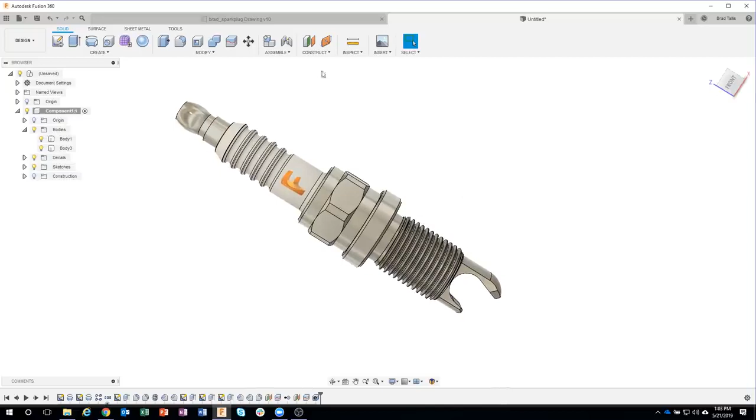I went ahead and created a drawing of this, which you see on the screen now. I've included a link to this drawing in the description of this live stream so you all have access to it. Hopefully there are no missing dimensions, but I'll reference this drawing as we go through.

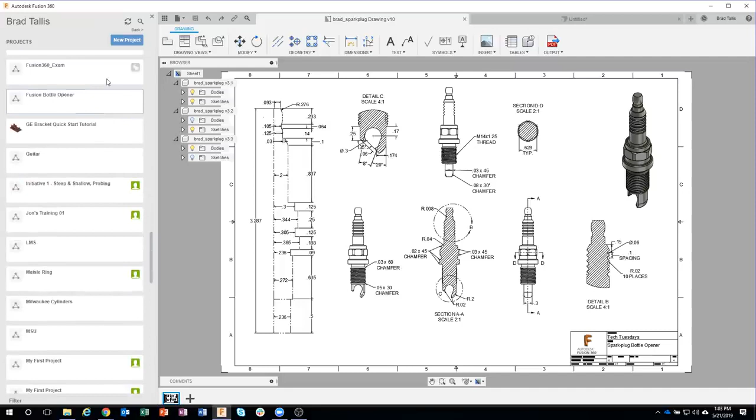The first thing I'm going to do is create a new project. I'll click this new project button and call it Fusion Bottle Opener. It's going to create a new project that I can save my data into. I'll go inside here, and you can see that right now there's nothing in here.

It's broken into two sections, data and people. When I start saving stuff, it'll show up here. But if I click on this people tab, you can see right now I'm the only person in here. Well, Aaron is our project lead for this, so I'm going to go ahead and add him and invite him into this project. That means he'll have access to the data inside this project, so he can view any of the drawings, any of the models, and make comments on it.

Later on in this live stream, I'm going to send an invitation or link to Angelo once I've finished the 3D model. So I've created a new project and invited the person I want into my project. This is great if you have an engineering team where multiple people are working on the project.

Then the next thing I'm going to do is start a new design and save it into this project, and I'll call it bottle opener. You might say, why are you saving it right now? Well, by pushing it into this project, my autosave has now kicked in, so anything I'm doing will get automatically saved per the time I have set in my preferences.

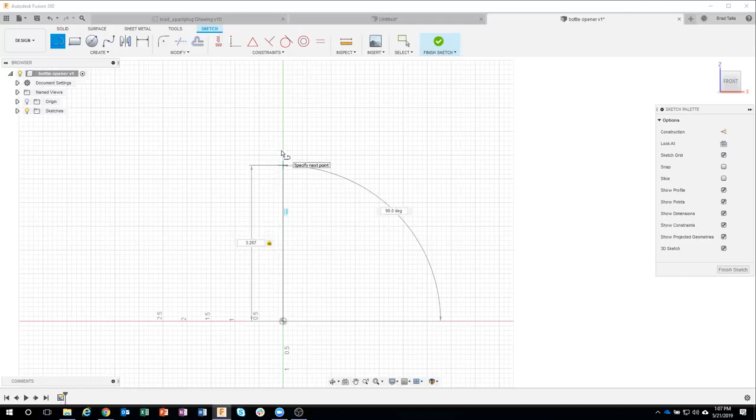Then I'm going to basically freehand the side profile. Instead of typing in a whole bunch of dimensions over and over again, I'm just going to freehand it. I know the overall length, according to my drawing, is 3.287, so I'm just going to draw a line straight up 3.287. Then I'll start down here at the bottom and type in a couple of these, and you'll see why in just a moment.

So I'm typing in 0.236. I'm going to zoom up here a little bit, and then I might do one more — this one's 0.5. The reason I'm doing this is I want to get a basic idea of the overall size, because now I'm going to just freehand the rest.

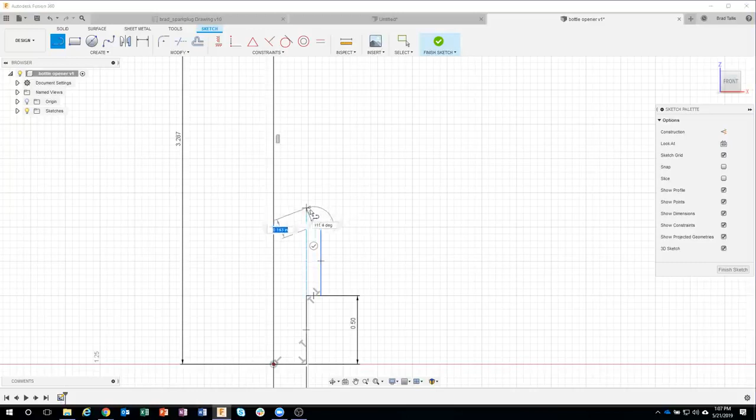Check this out — I'm just going to click over, come up a little bit, and again I'm following the drawing to get the basic shape of what this looks like. So I'll come up, making sure I don't hit that little green check box, and just kind of come to the side of it and fly through here real quick.

Let me just do something like this — come up, come over a little bit, come up, come over a little bit more. As I zoom out, I can kind of see I'm near the top, which is about where I want to be. So this is going pretty good. I'll go something like this, come over — I'm going to have to zoom up just a little bit.

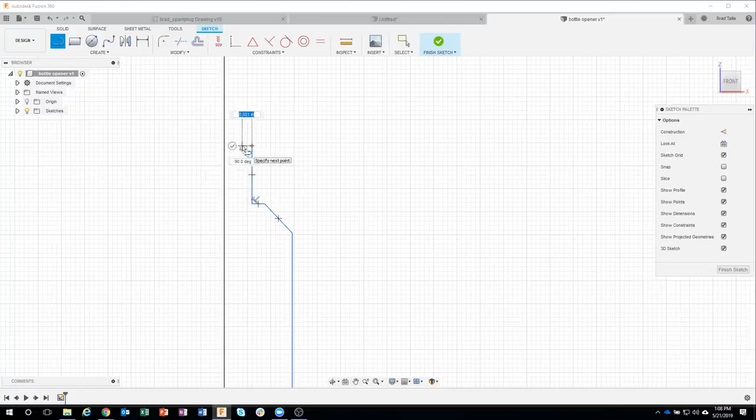Again, you'll notice I'm not typing in any dimensions at this moment — I'm just getting the overall shape that I want, using my drawing as a reference. You'll notice it's creating these perpendicular constraints for me automatically, which is good because I want straight horizontal and vertical lines, but they're kind of in the way.

So here's a neat little trick — I'm going to turn off show constraints, and you'll see that really simplifies what my sketch is going to look like. Now I can come in and start dimensioning the rest of this.

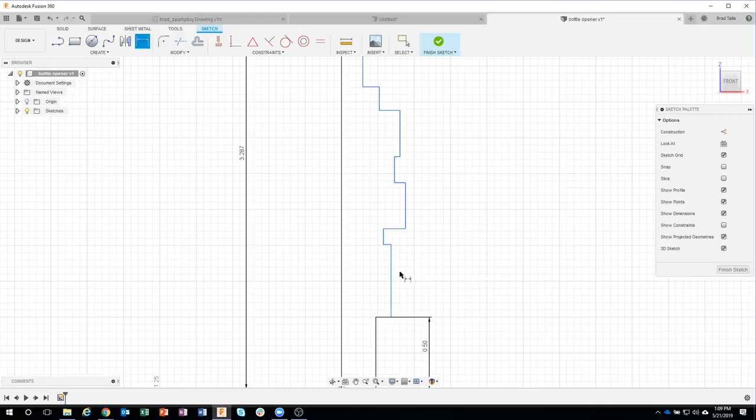So I'll hit D for dimension, and I'm just going to click on some of these heights. For example, this is supposed to be 0.635. Now watch what happens when I do this — this is exactly why I said to start creating your basic shape and get some dimensions on there. You'll notice that when this went above it, it made things a little confusing.

Well, all I have to do is grab that line and bring it up a little bit. So if your sketch overlaps or whatever, you can drag that up, or I could even drag a window and move all of them at the same time. So you can see how I'm able to update my sketch easily instead of having things overlap. You might see this happen as I continue on, but you don't want to get confused, so just do it step by step.

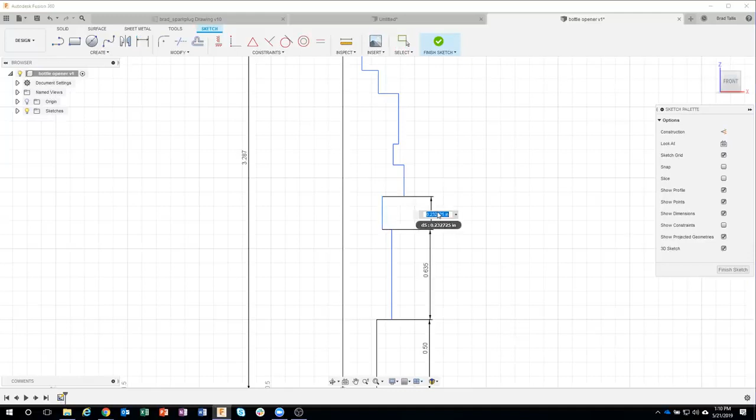So I'm just going to continue dimensioning here. Again, I just have to type these in — let me put my glasses on so I can read these.

0.09. And when I hit enter, you're going to see that my sketch updates. So I'm just working my way up the drawing. So I'm going to say 0.188. This one's 0.125, again pulling this off of the drawing. This is a quarter inch, 0.25.

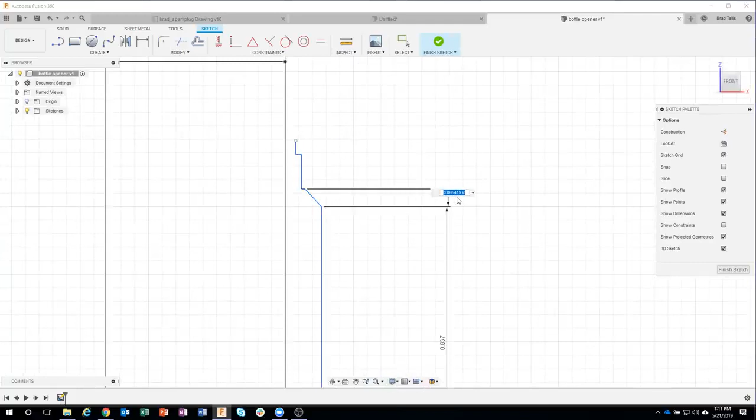And you can see that this actually goes pretty quick. Instead of having to type in multiple dimensions while sketching, like the horizontal, the length, and all that kind of stuff, I'm able to just come in and say all of my heights. So you can kind of see how that updated just a little tiny bit. Let's zoom up here—this height is supposed to be 0.1. And you can see, again, another example where my sketch changed a little bit.

So I might want to move these guys over, okay? Or I could just bring this point over like so. I have a bunch of different methods there, but I kind of want to keep my overall profile. I think it just simplifies things. So let's go ahead and finish this up, 0.14.

That one kind of made my sketch disappear a little bit, so I'm going to undo. Let me just get rid of that dimension, and let's bring these up a little bit, like so. Okay, and now I can throw my dimension on here and say 0.14.

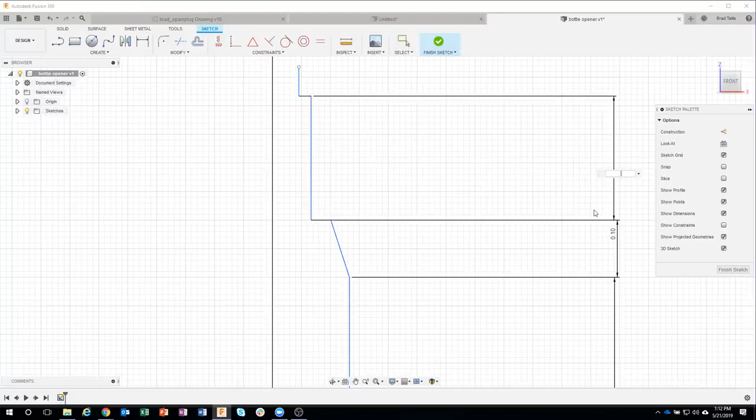And then finally I have this 0.064. Okay. So then I'm going to do one more across the top here, and this one I know is supposed to be 0.093. So then the next thing I'm going to do—I've done all my heights, now I'm doing all of my widths.

So I'm just going to go ahead and pick my center line and that other line and kind of work my way back down. So that's 0.105. This guy here is supposed to be 0.125.

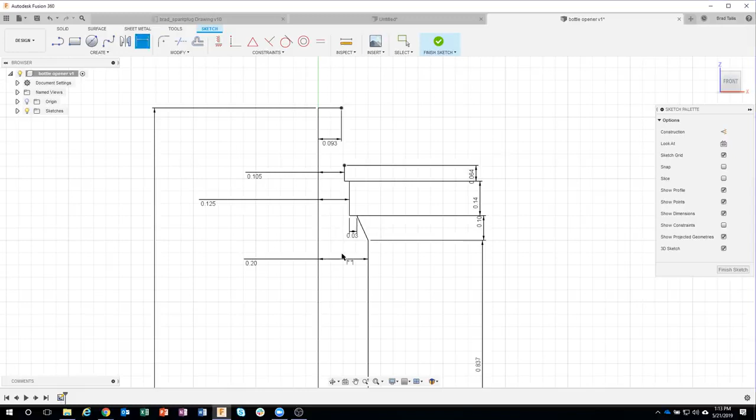And we can kind of see how some of this stuff is updating. Let me go ahead and do this dimension here—that's 0.2. And we can kind of see how that's all updating. There's a dimension here that's supposed to be 0.03. And we can see my sketch is now starting to turn black, which means it's being fully constrained.

By these dimensions, you'll see some here that are blue because we haven't constrained those yet. But if I come in here and add a dimension, that one's supposed to be 0.3. You can see how these are now updating and saying that they're fully constrained. So 0.344, 305.

Just a couple more here and then we'll be totally done with our profile. Now, you've heard me say in the past, keep your profiles simple. And this is taking a little bit of time, but we're actually making a really descriptive sketch here. So let's go 0.236.

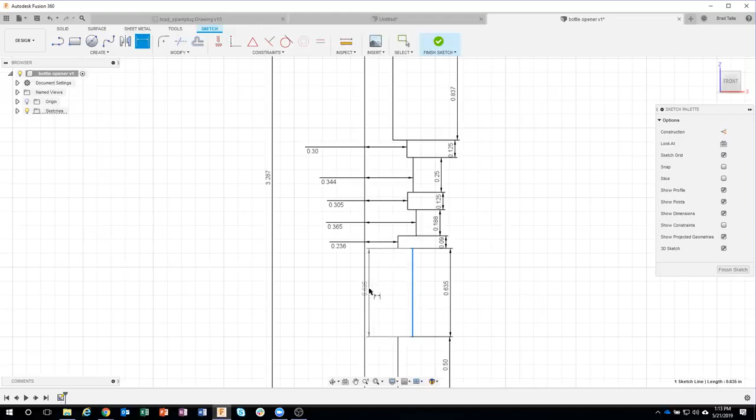And this guy here, I think is our last one, 0.272. Okay, so we can see that our sketch is totally black and fully constrained. However, I don't see it shaded in, saying that it's a valid profile. So I need to figure out what's going on there.

So I zoom up here, we can see that we actually haven't finished the sketch yet. And there's a curved section right here. So I'm going to go ahead and add in that curved section.

Okay, so I'm going to use the 3-point arc. I'll just click on that start point, that end point, and then I'm just going to kind of click out here in space like so. And notice what happened—because we closed this profile, it's now kind of shaded in with that tan color, saying that it's a valid profile.

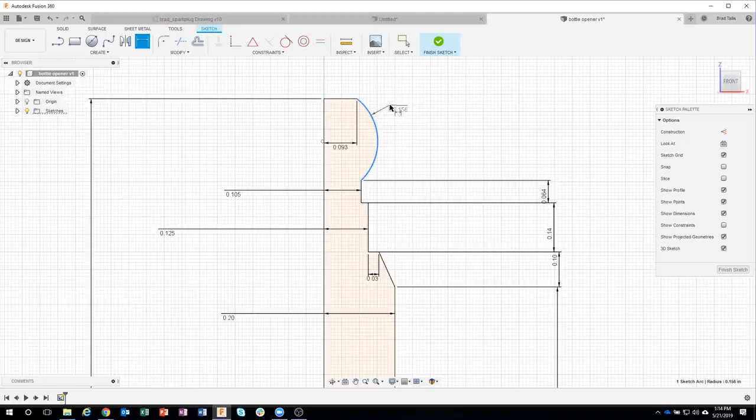I have a couple more dimensions on here, so let me just go ahead and put a dimension on here, and the radius is 0.156. And we can see that that is now black, which means it's fully constrained. We now have a valid sketch.

And I've mentioned in some of my previous live streams, you want to try and get a valid sketch, a fully constrained sketch, as much as possible. That way, if you make a change, you don't get weird results. So we spent a little bit of time typing in the dimensions, but now we're actually ready to turn this into a 3D model.

So I'm going to go ahead and finish my sketch. And I'm going to say create, and instead of extrude like we typically do, I'm going to come in here and say revolve.

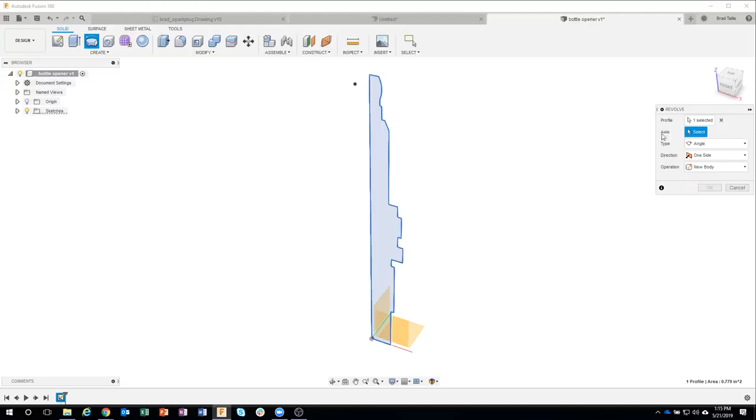It's asking for the profile, so I'll select the profile. Then it's asking for the axis. What do you want to revolve around? I'll click that vertical line down the center, and you can see we get a nice 3D preview of what this is going to look like.

I'm not going to go through all of these, but at the very bottom you can see it says new body. Well, you know what? I got to thinking, gosh, I probably should have created this as a component. In some of my previous live streams, I talk about how you should always try to create your objects as components, but I forgot to.

But check out this cool little trick. I'm going to go ahead and say new component and say OK. And sure enough, it created a component for me. I can go ahead and rename it. I'll just call this plug.

However, my sketch is not part of this component, and I really wish it was. Well, all I have to do is just drag this down on top of my plug component, and you can see that it put that sketch down there for me automatically.

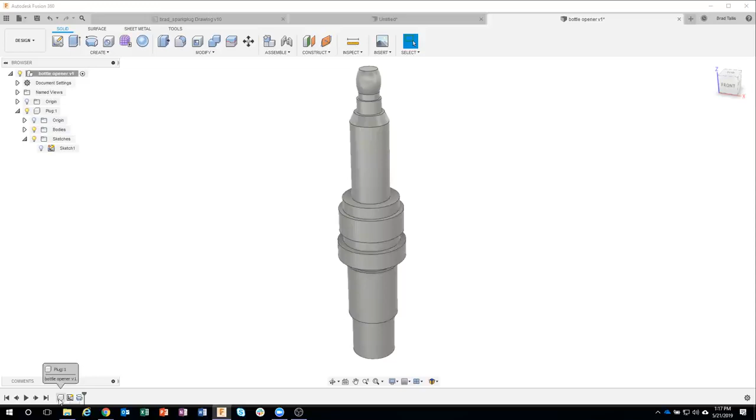Notice how smart Fusion is. Even though I created the sketch first, it actually said, oh, you have to have the component created first, and then you can do the sketch. So it actually fixed my problem for me. I think that's really cool.

And again, I really like having components. It keeps your timeline simpler. Now, in this case, I only have one part, but still, I'm just going to go ahead and activate that component and keep everything kind of organized underneath.

Okay, so looking at the drawing, I'm going to look at this and say, okay, what's the next big thing I want to create? We can see that there are these little grooves right here at the top of our part. You might ask, well, how come you didn't draw those as part of your profile? I absolutely could have, but I'm going to show you some neat tips and tricks with this.

Like I mentioned before, I like to keep my sketches simple and let Fusion do the hard work. So I'm going to go ahead and create one of these circles here and cut it into our part, and then we're going to use a pattern to add the rest of these.

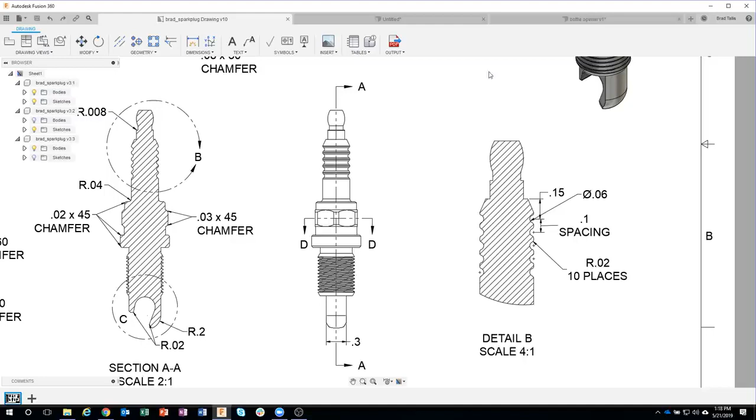Okay, so I'll go ahead and say create a sketch. Let's just do it on our front view here. I'm going to zoom up so we can see what's going on. C for circle, or I can hit the circle command here.

I'm just going to hover over this point, and you can see it creates what's called a snap guide. So I can hover over that point and come down a little bit. You can see how it's basically sticking to the side of our part here. So I'm going to go ahead and click, and our circle is 0.06 in diameter. So I'm going to type in 0.06.

Then I want to make sure it's in the correct location, so I'm going to throw a dimension according to the drawing. This is supposed to be — and I was pretty close — 0.15 from the top. So there you go. So I drew the size I want, it's right on the edge. I'll do 0.15. And we're going to use the exact same command.

We're going to say revolve. We'll click on our profile. What's the axis? Well, I can come in here and just click on a cylindrical face like so, and you'll notice it gives me a red result. That is because of this operation right here.

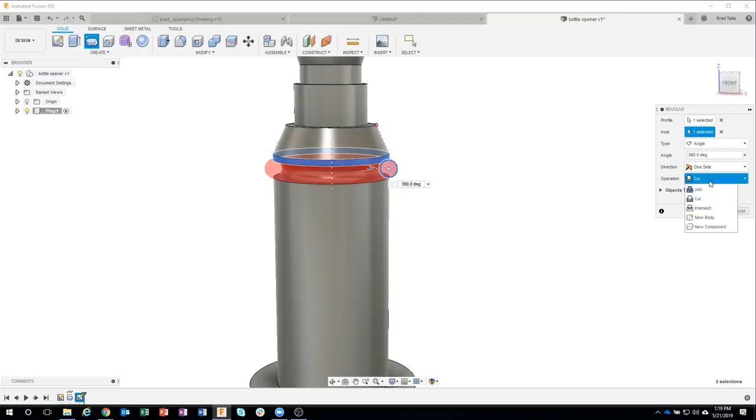We're saying we want to cut that profile away. If I said join, it would actually create almost like a ridge or like a bump or something like that, but in this case we want to cut that away. Okay, so I'm going to say OK, and we've just created our very first groove.

Now I want to create 5 of these total. So again, instead of creating a complex sketch, I could come in here and say let's create a rectangular pattern. Now I know that seems kind of weird, but we want to make it go in one direction.

Okay, so along a line basically, I'm going to say rectangular pattern. And here's the cool thing: you'll notice that under pattern type we have faces, bodies, features, and components.

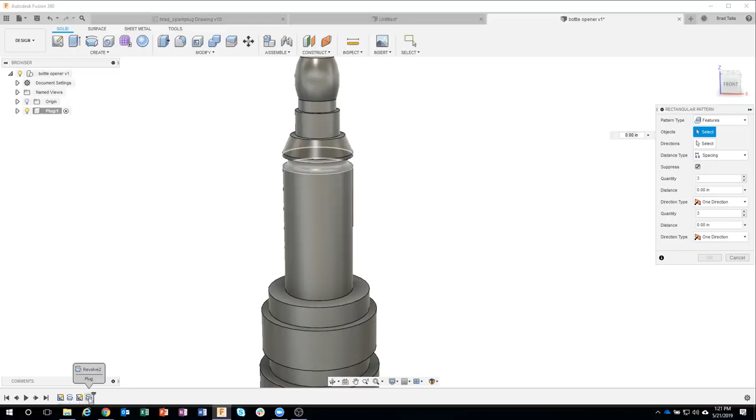Now I could select faces and then click on that face. But what if there was a bunch of different faces, maybe 3, 4, 10, 12? I wouldn't want to have to select all of those. So instead, I'm going to change this to features, and I'll select the Revolve feature in the timeline. That is going to select anything that has to do with the Revolve feature.

So I use this one I would say 95% of the time. The direction, I'm going to specify in this vertical direction, clicking on this vertical axis right here on our origin. And now I get these little arrows, and I can specify the direction. We can see that we're now patterning that Revolve feature down in that direction. I said I wanted 5 of these, so I'm going to click on 5, and now we can see there's 5 of these rings.

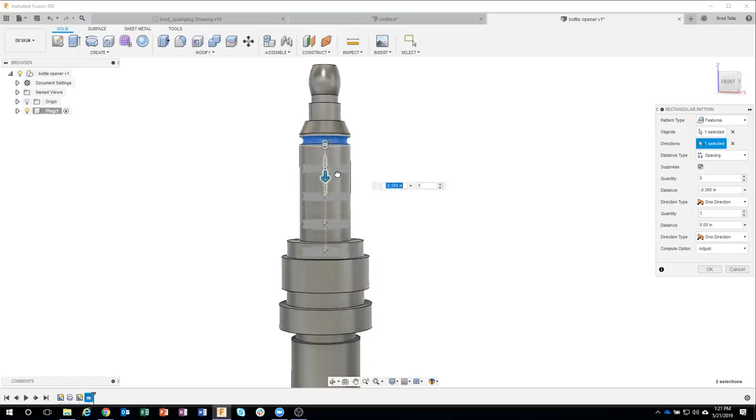I also want to specify either extent or spacing. By default it's usually set to extent, but in this case I'm going to say spacing, and I want them spaced 0.1 inch apart, according to the drawing. I'll say OK, and now we have all of those grooves.

Now, I know that seemed to take a long time because I was doing a lot of talking, but literally, you just select it, tell how many you want, and it creates the pattern for you.

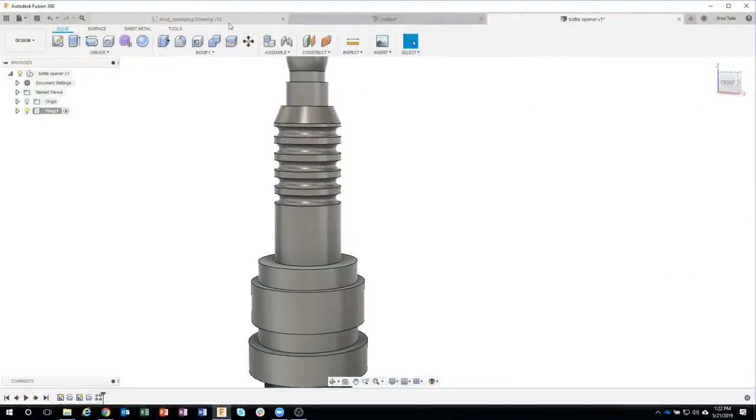Now check this out, this is probably my favorite part. According to the drawing, there are little tiny fillets or blends on each of these little ridges, so there's quite a few edges I'd have to select and put a 0.02 radius on those.

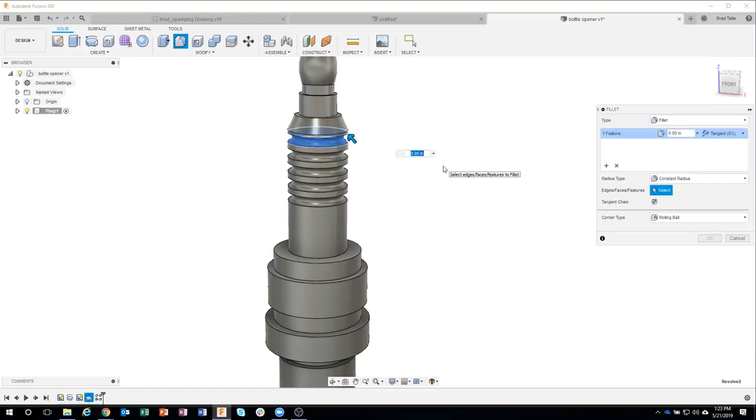Well, check this out. Instead, I'm going to come in here and say fillet, and come down to my features here, and notice what happens when I'm hovering over these. I'm going to click on this first one, and now it's asking for a size. I'm going to say 0.02, and look what it did: it actually picked the edges that had to do with that particular feature. So instead of me having to manually hover over and click those edges, I was able to just click that feature. In fact, let's add in the pattern feature, and boom, instantly it filleted all of the edges for me.

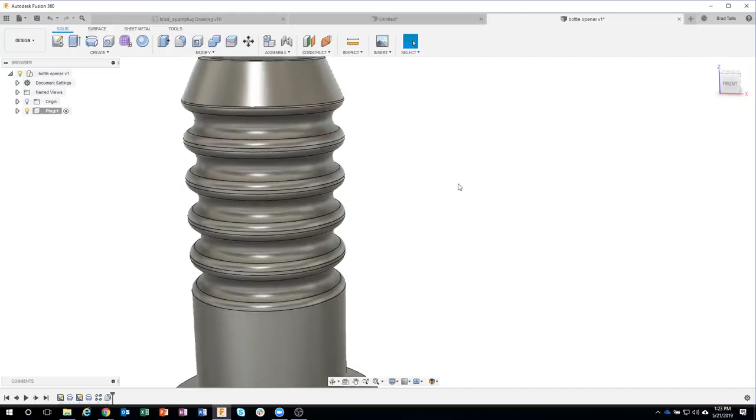So I could have done edges, or I can do features. Literally in about 2 mouse clicks, I was able to blend all of those in one fell swoop. Hopefully you think that's as cool as I do. I think it's pretty neat, honestly.

Okay, now basically, like I said, I'm kind of working my way down with the major stuff. I noticed there's a fillet, some chamfers, this hex nut shape, so I'm going to keep working my way through this model. I know there's a fillet here.

So one of the tips I really like to use is the pre-select and then the right mouse click. What does that mean? Well, I click on this edge to pre-select it, and then I right mouse click, and it shows me the commands that make sense. So instead of having to always go into a menu, I can just click on something, for example a face, right mouse click, and there are the commands that make sense.

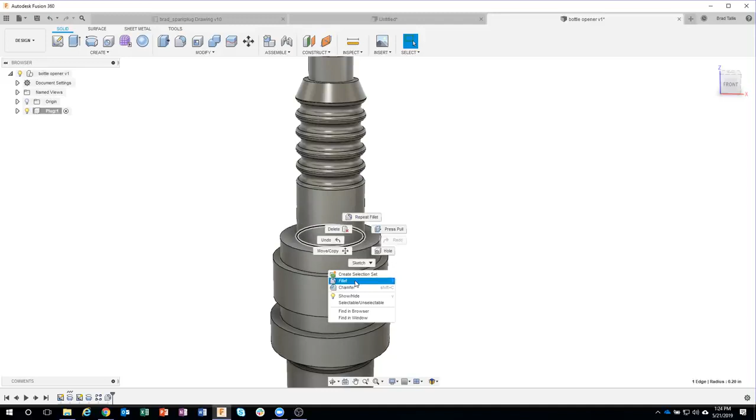Okay, so this is really fast for fillets and chamfers. I just click on the edge, say fillet, and that's supposed to be 0.04. Then I'm going to click on this edge and say chamfer, that's supposed to be 0.02. Now according to the drawing, there's a couple other edges that are also 0.02, and I kind of like to group things together, so I'm going to do all 3 of these edges at the same time, which simplifies my timeline.

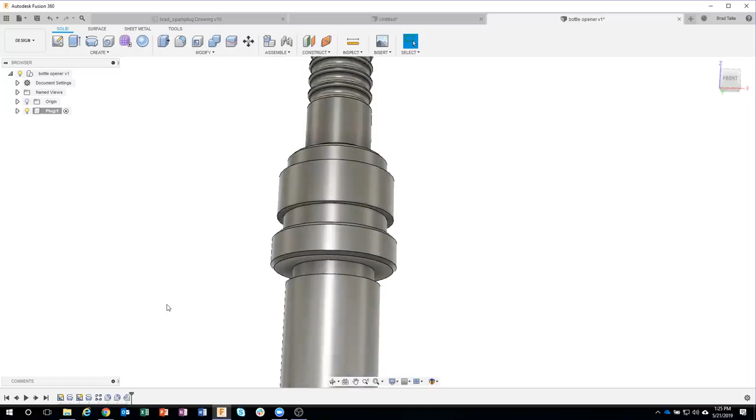So I only have basically one chamfer feature in here. I could have done all 3 of these as 3 separate chamfers, and that's totally fine, but I kind of like to group things together. If they're the same size, let's just do them all at once. Again, not saying that's how you have to do it, I just find it easier that way.

And then there's a couple other chamfers that are a different size, so let me go ahead and again pre-select, right mouse click. I'll say 0.03, and I'll select both of those edges for my 0.03 chamfer.

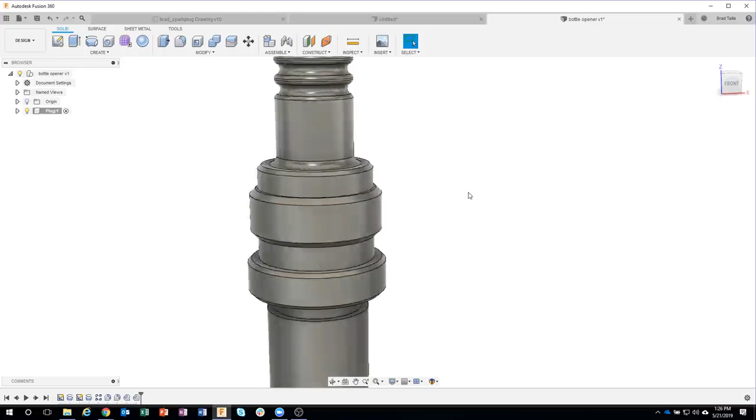Notice how complex our side profile is here. I could have drawn these chamfers as part of my profile before I revolved it, but that would have taken extra time and a lot more dimensions. I would much rather do it in 3D than have to do it in 2D.

The next thing I want to do is create a hex nut pattern on our part. According to this section view, that's about 0.628 across. I'm going to show a cool little trick here.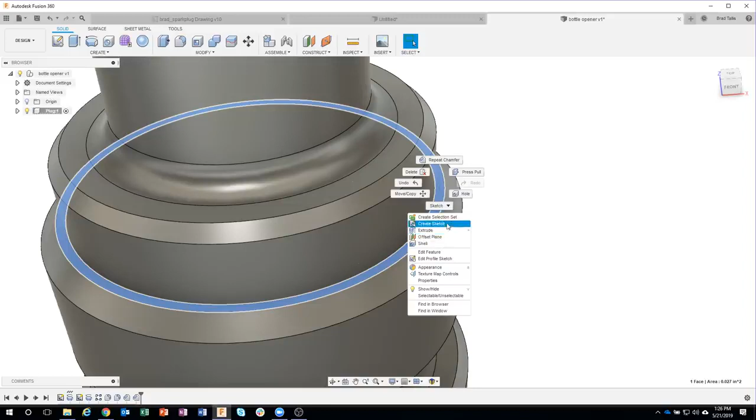Let's go ahead and pick the face that I want to put this on. It's actually going to be on this face right here. I'll click on that face to pre-select it, right mouse click, and it shows me the commands we can do with that face. I'm going to go ahead and create a sketch on that face.

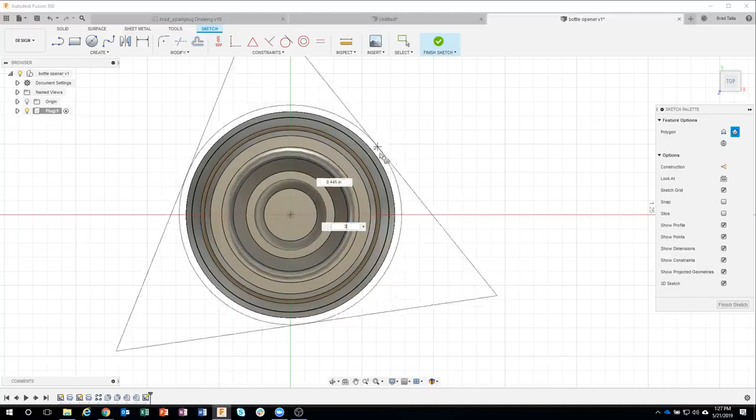In our sketch menu, we have a cool command under Polygon called Circumscribed Polygon or Inscribed Polygon. I'm going to do this Circumscribed Polygon. I'll click our center point, and you can see what happens when I bring this out. It's creating a 6-sided polygon that's touching the outside of that circle, and you can see the number 6 right here. If I change that to a 3, it turns into a triangle. So we want to put that back to 6.

I'm just going to click over here somewhere. I don't care about the size or anything like that. Now I want this edge to be vertical, so we'll add a horizontal vertical constraint. I'll click on that guy and we can see how it became vertical.

Now I also want this edge to be tangent with our part, so I'm going to say tangent, click on that edge there, zoom up here a little bit, and click on this edge right here. You can see it highlight blue when I click on it. And we can see how that polygon is now tangent to that circle, and it's also vertical because we forced it to be a vertical constraint.

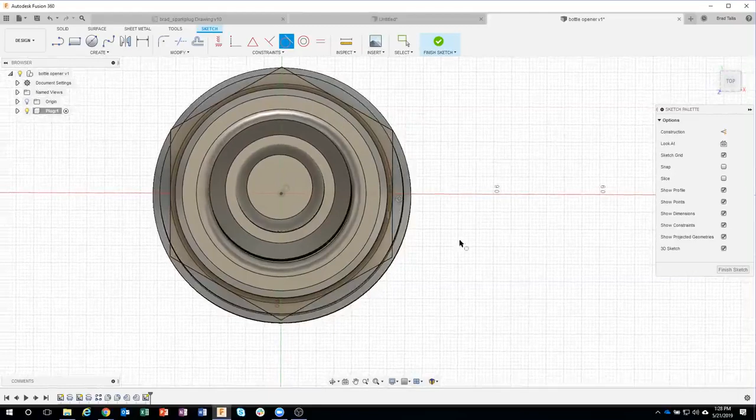If I throw a dimension on here really quick, we could confirm that's the correct size, 0.628, and it says it's going to over constrain, which is because it's already fully constrained. So I could say OK to create a driven dimension, and sure enough we can see that's 0.628. I'm going to undo back because I don't need that.

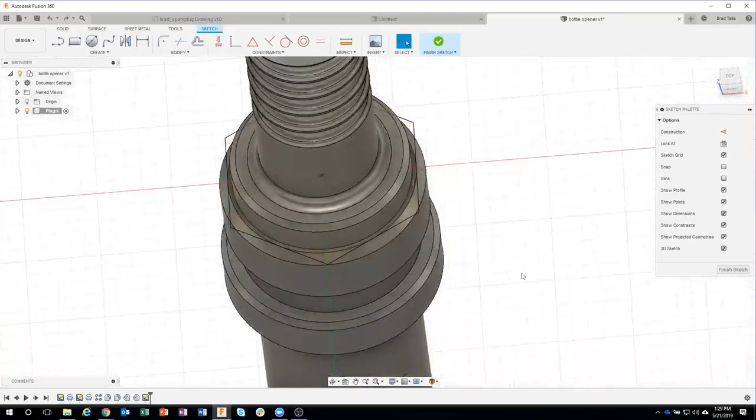If we take a look at this, we've created this hexagon profile, but I want to machine away where these flats are. I could potentially use the intersect command, but that probably would destroy a lot more of my model, so I need to add another profile here.

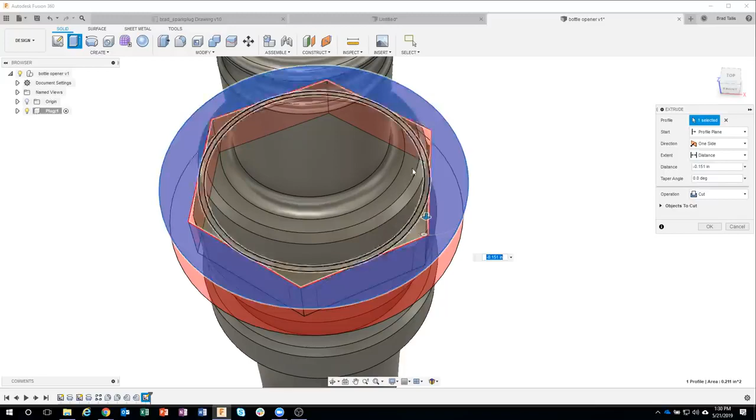I'm going to just create another circle that goes larger than this polygon, and that's going to allow me to create a profile like this. It's almost like an external profile, and now we can see it's going to keep everything inside the hexagon. If I say extrude, it's going to machine away and create these flats for me. So there might be some situations where you need to add an extra profile around, for example, the outside, to get the reverse of what you have with just a single profile.

Here's another tip you've seen me use before. How far do I need to go? All I have to do is click on this face right here and it's going to snap to that face. I'll say OK, and we very quickly were able to create this hex shape part.

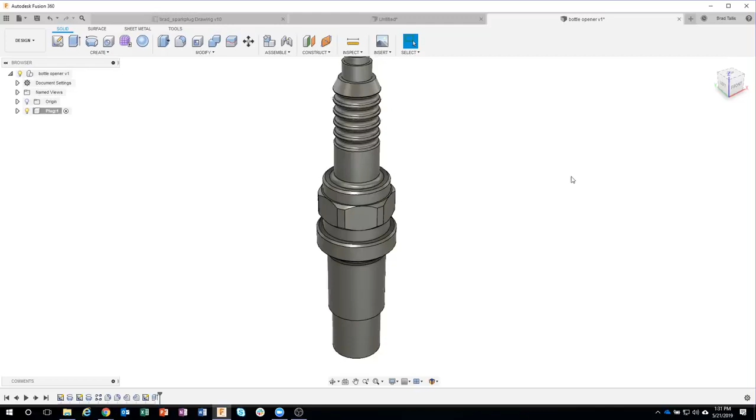Moving forward here, I'm going to go ahead and add a couple more details. There's a really tiny fillet on the top here. I think it's 0.008 according to the drawing.

I tend to try and do my type commands in my timeline. So you'll see, for example, right here, I've got my fillets and chamfers kind of grouped together. I try and do those as much as I can.

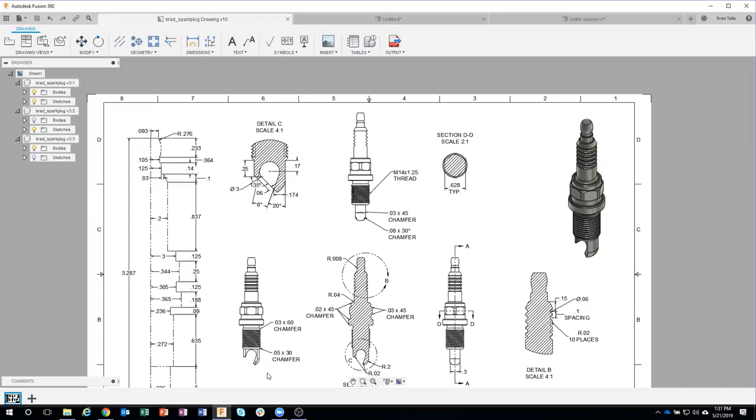Now let's jump back to the drawing really quick. We've been working our way down. I'm going to leave the threads for last because they're pretty intense and heavy. So now I want to start working on the actual opener part, and there's a lot of information going on here. Let's break this down into its simplest form - it's kind of a rounded shape.

I'm going to start by adding this 0.2 radius on our 3D model. I'm just going to zoom up here, click on that edge, say fillet, and that's going to be 0.2. And you can see how it rounded that whole bottom edge.

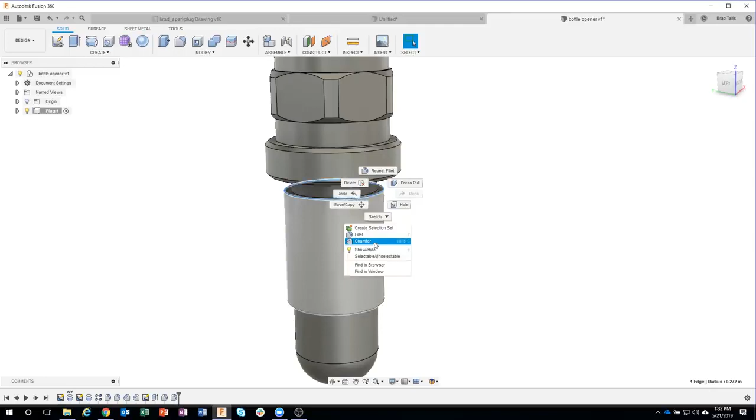Then the next thing I want to do - maybe there's some chamfers going on here. I'll go ahead and add those. I'm going to click on this guy and say chamfer. Now according to the drawing, this by default is usually set to equal distance. Let's type in the 0.03. And we can see that that worked.

But according to the drawing, it's 0.03 at an angle of 60 degrees. So under chamfer type, I can come in here and say equal distance, which makes it basically a 45, two distances, or distance and an angle. So I'm going to change it to distance and an angle, and now you can see it's 0.03 at 45 degrees. Let's change that to 60 and watch what happens to my chamfer. You can see how it slopes down at 60 degrees - it goes in 0.03 and slopes down 60 degrees.

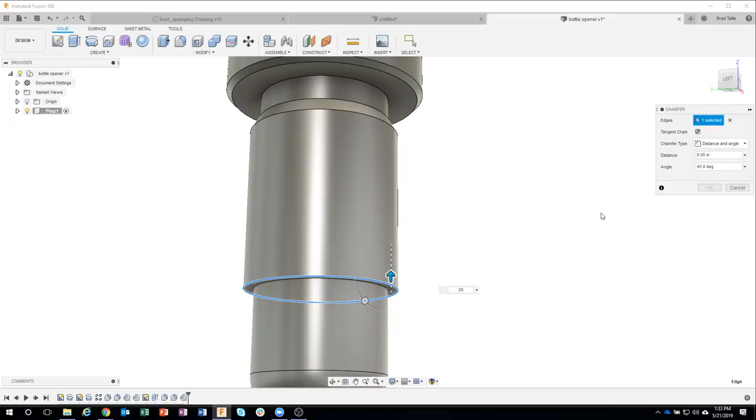I'll go ahead and click on this edge here and say chamfer. This one is 0.05, but notice what happens - I type in my distance and I get an error. It says the fillet cannot be created at the requested size, and that's because of this angle right here. It's 0.05 at an angle of 30 degrees, and we can see how now that chamfer works correctly.

So there are a couple options in some of these menus - check those out. I'll say OK.

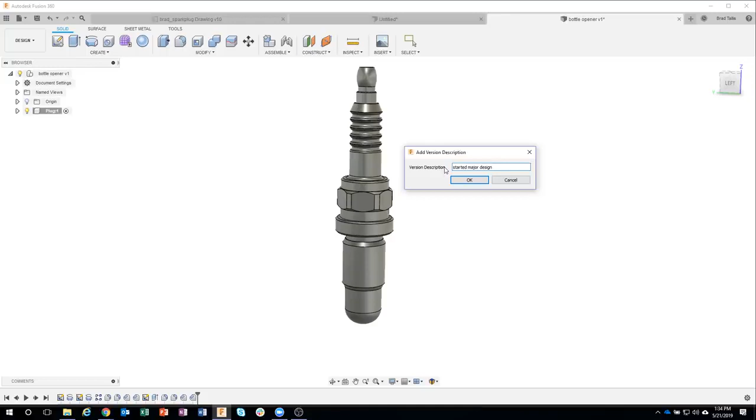Now I've got quite a bit done, so I should probably save. Because I already saved, you can see it's at version 1. All I have to do is click save. I could type in a description if I wanted to - I could say 'started major design' or something like that. It's going to go ahead and save that as version 2. So you can see now it says version 2. I recommend saving fairly often.

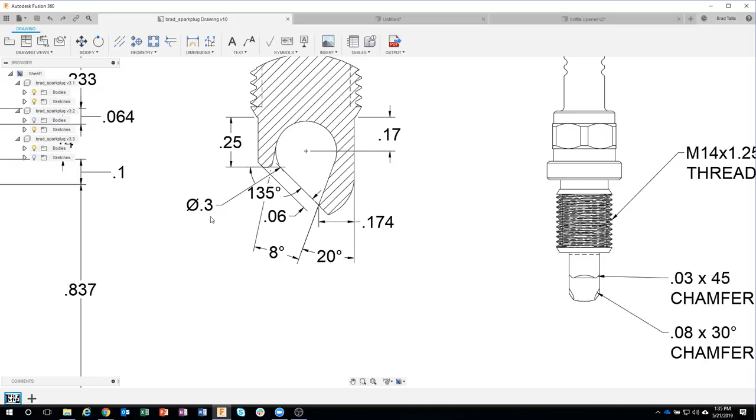So the next thing I want to start doing is working on the notch part of this, the bottle opener part. I'm going to go ahead and create a sketch. Using the drawing, I'm going to be basically creating this area right here, and we can see there's quite a few dimensions. There might have been an easier way to dimension this, but this is what I came up with, so hopefully it makes sense. We're going to start with the major part, which is this 0.3 circle, and then I want to create these angled edges.

So I'll start by creating a circle, and I'm going to purposely create it off center. As I've mentioned in previous live streams, I like to force Fusion to use these constraints and make sure that they're correct. So for example, I want to say make that point and that point vertical with each other, and we can see that it physically moved over - to me that's verification that it worked. I could have drawn it close to this line and hoped it was close, but I like to physically see it happen.

Okay, I'll throw a dimension on here. I know that this is 0.17 from this edge, so I'm going to say 0.17, and that pushes it down where it needs to be. I can see that that has turned black, so I know that that's physically constrained.

Now I want to draw the notch part, so I want my lines to be tangent. I'm going to hover over this line, hold down my shift key, and watch what happens when I draw my line.

You can kind of see how it's staying tangent to that circle. So I'm just going to draw something like that. I'll come over here maybe a little bit, and then hold down my shift key again until I see the tangent icon kind of pop into place. We can see that little circular icon with a line on it - that's my tangent icon. So I'll go ahead and click, and sure enough, we can see there's tangent and there's tangent.

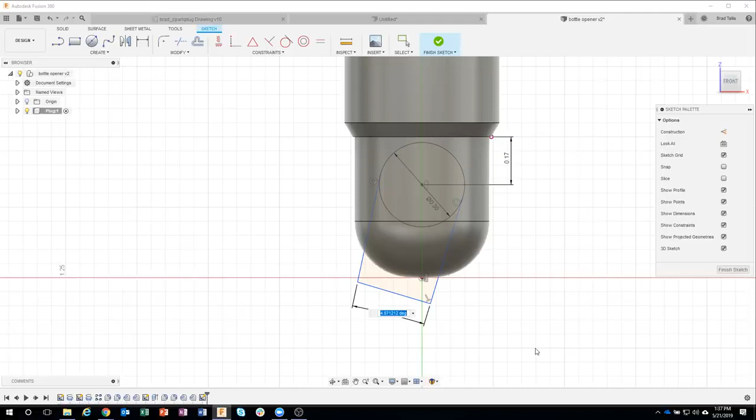Okay, so now I'll start throwing some dimensions in here. I know that the angle between these two lines needs to be 8 degrees. Watch what happens - it goes ahead and does that. It moved my dimension, let me bring this back down here a little bit. It kept my lines tangent, but it made that 8 degrees. You can see I can move this around, for example.

Okay, I also know that it needs to be 20 degrees from this vertical edge. Now, unfortunately, I don't have an actual edge right there, and I want to have one that I can reference. So we're going to use the project command. I'm going to come over here to project, and I'm just going to go ahead and project the whole body. Watch what happens when I hover over and click - you'll see that it will project all of these edges. In fact, if I turn off the body, you can see it projected that outside profile for me. Now I have something that I can dimension.

For example, this line and that line - I want that to be, instead of 18 degrees, I want it to be 20 degrees. Watch how the little notch kind of rotates a little bit. It still stays tangent, but I've now specified the exact angle of this notch. That's kind of the important part here.

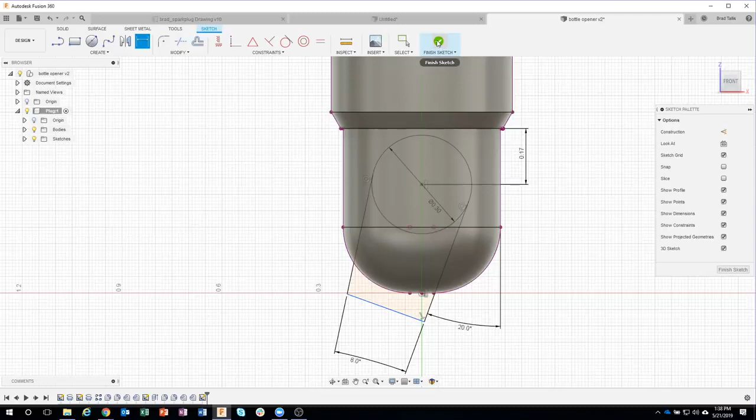Okay, so I'm going to go ahead and finish my sketch because I'm pretty much done here. Now, here's an issue you're going to run into. I want to select that profile, and you'll notice that the faces are kind of in front of it, so I'm not able to select that profile. Well, if I click and hold for about a second, you'll see it allows me to probe through - so there's the first thing it's hitting, and then there's the second thing, the profile.

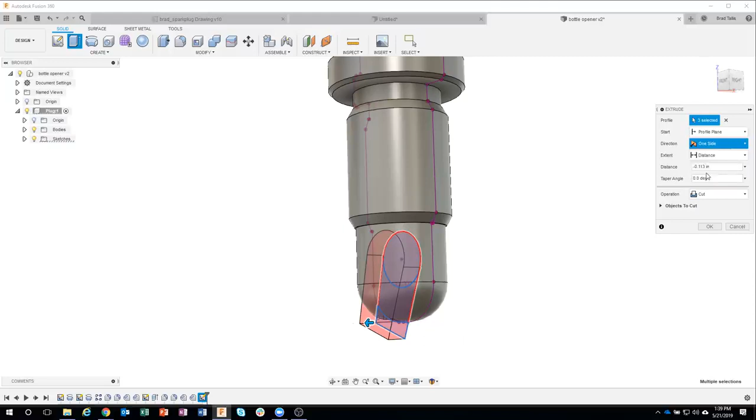So I'm going to do the same thing here - click and hold, grab that profile, and grab that profile. All you have to do is click and hold. We'll say extrude, and I'll start to extrude. Now how far? Well, I want to go symmetrically, and I want to cut through all of it, so I'm going to say all - I don't care how far it needs to go, it needs to go far enough to cut through all of it. We can actually see the preview that it's giving us. I'll say OK, and we now have the basic shape of our notch.

Hopefully this is making sense for everybody. Okay, looking at the drawing, if we look at it from the side here, we can see that it's only going to be 0.3 wide. So we're actually going to have to remove some material over here, so I'm going to go ahead and do that next.

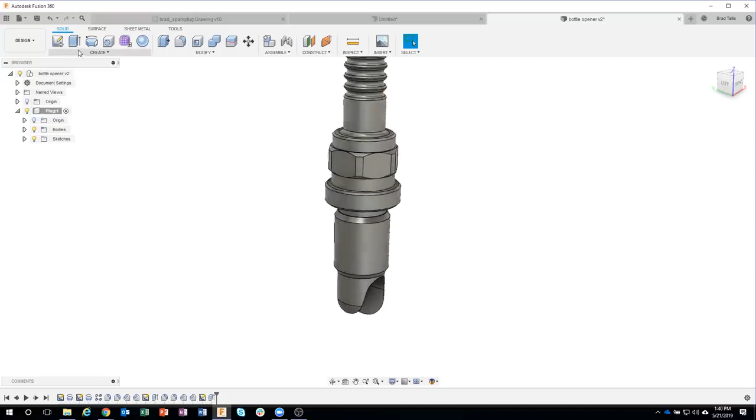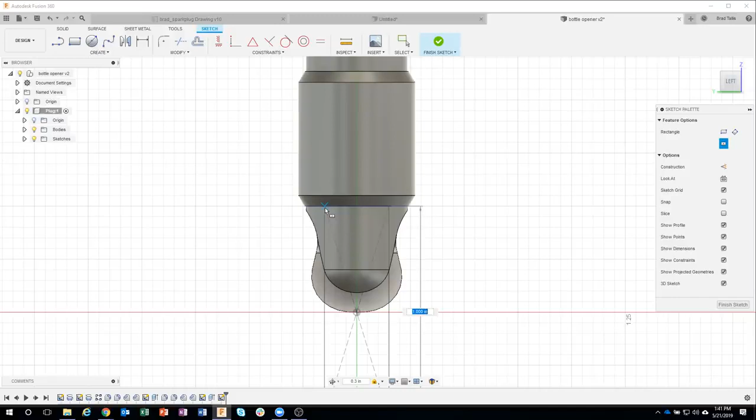So let's take a look and come in here and let's just go ahead and create a sketch, maybe on this left plane. And I want to keep a 0.3 region. So here's another little tip that I tend to use - I really like this center rectangle command. So even though I started the regular rectangle, the 2-point rectangle, I'm going to click on center rectangle. I can click here and start to move, and you can see that it's asking for a width. Well, let's do the 0.3, and it's now locked that into place. So no matter how I move my cursor now, you can see that we are locked at 0.3 wide. And then all I have to do is get near this top edge right here, and you can see how it's going to snap to that. So I'm just going to go ahead and click, and we're guaranteed that this is 0.3 wide.

Well, just like before, we want to keep what's on the inside and remove what's on the outside. So I'm actually going to add another profile here, something like this, just an extra profile. And what that's going to do is basically keep what's on the inside and allow me to select these guys as what we want to remove. So I'll say extrude, I'll start to drag.

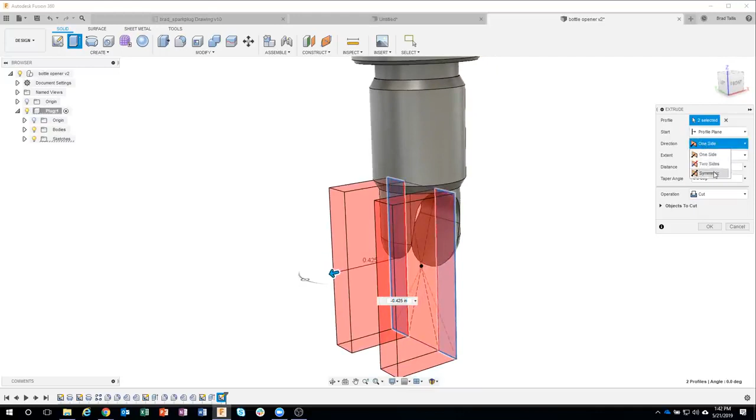I'll go ahead and say symmetric. I could say all, but in this case I'm just going to show you can drag whatever you want. Say OK, and we've now cut that geometry away. So we kept the 0.3 and used some extra geometry on the side to remove that away. Now we're starting to get the overall shape of this bottle opener.

Going back to the drawing here, let's take a look. I want to continue on. There's some little notches here to remove, and this basically helps it grab onto the bottle cap easier. So I'm going to go ahead and start doing that next. I need to remove a bunch of material here and create this particular angle.

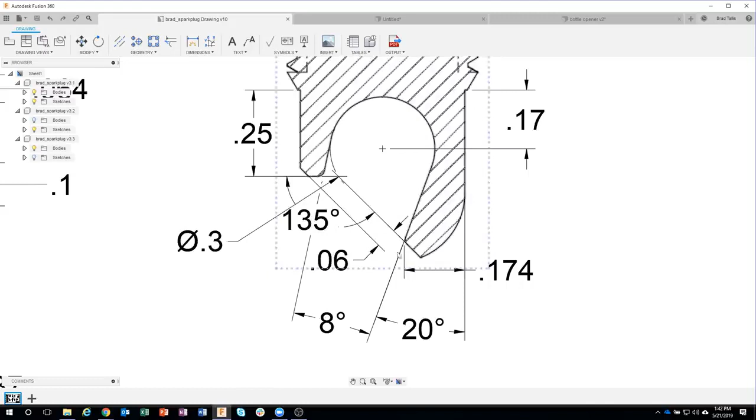Using this drawing, I can see that it's at 135 degrees, and it's 0.25 from this edge right here. So I'm just going to go ahead and draw that. I'll say create a sketch.

I actually get this question a lot: how many sketches should I do? One complex sketch with all my stuff on there, or a whole bunch of different sketches? Honestly, it's really up to you. I like to keep having multiple sketches, that keeps them simpler. If I had one sketch with all this geometry and all these dimensions, it can get confusing. But I don't want to create a sketch for every single rectangle and every single circle, so just do what makes the most sense. You can see how I'm breaking this down into smaller chunks.

So we're going to create a sketch that defines the correct angle. Let's just draw something like this. I'm going to come across, come down a little bit. I'm going to hover over this point so it creates a snap guide for me, so you can see how I get that dashed line telling me I'm perfectly lined up with it. Then I'll go ahead and close my profile.

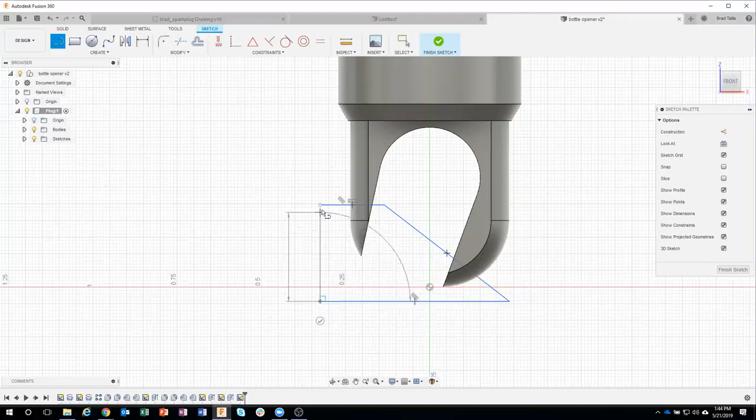I want to add a dimension from this horizontal line to this angular line, and it says it's 142. Well, I want it to be 135, and it's actually going to update my sketch for me. So now I know I'm at the right angle.

I need to be a certain distance from here, so I'm going to click that line there and that line there, and that was pretty close. Let's just type in 0.25. We can see how my sketch kind of lifted up a little bit.

But then there's a dimension that goes from right here to the edge of this opener, and you'll notice that it's trying to dimension this whole line. I really can't click that point. If I were to click there and click here, you'll see it's going to give me an angle and not a distance. The reason for that is there's actually not a point right there that it can catch to. So again, I'm going to use the project command.

I'll come in here and say project, and let's go ahead, I'm going to project the whole part again and say OK. We can confirm, sure enough, that it projected that profile for me. But again, if I were to try and dimension, it still doesn't have a point, and you can actually see there are points on my sketch here.

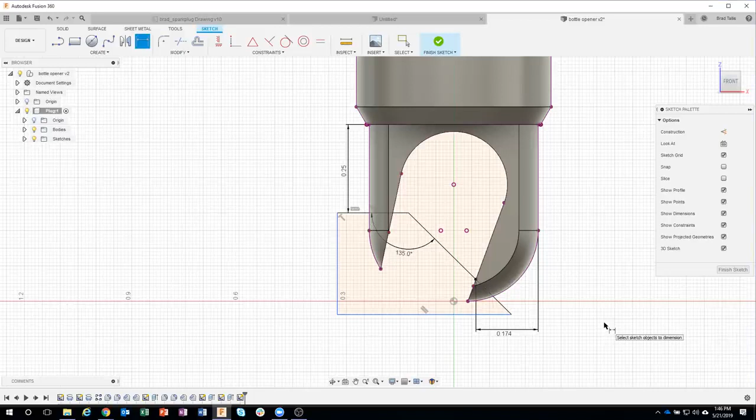If I were to try and dimension, it'll let me catch to that point now, and I can catch to this point and place my horizontal dimension. In this case, it's supposed to be 0.174. I was really close, 0.174, and watch what happens to my sketch. You can kind of see how it moved a little bit. I'm going to undo so you can see that.

I'm going to undo. So that's where it was, and that's where it went. Notice how it kept that point on that line. I think that's really slick. So it updated my sketch exactly how I wanted it to, and this is all I need. I need to be able to machine a section of this away. So I'm going to say Finish Sketch.

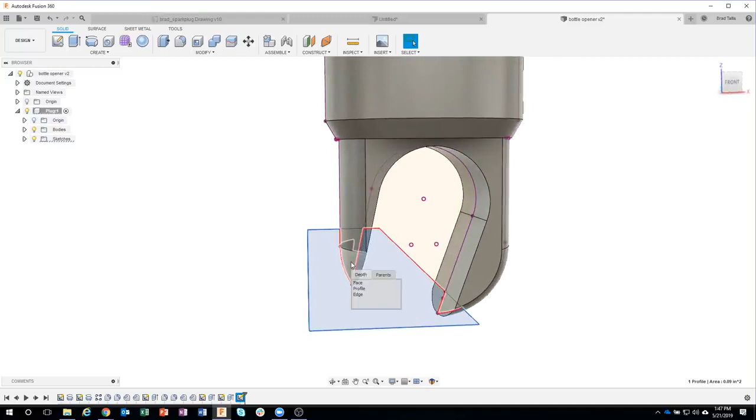And now I'm going to machine this away. Here's another tip for you. If I click on this to extrude it, notice it's leaving out some of my profile, and those profiles are buried. So I'd have to click and select Profile, click and select Profile, right? Well, there's an easier way.

Check this out. I'm going to start by right mouse clicking and saying Extrude. It's asking for the profile. I'm just going to draw a box around that, and it selects all of my profile for me automatically, so I didn't have to probe through or anything. The only thing you have to remember is to start the extrude command first and then select your profile.

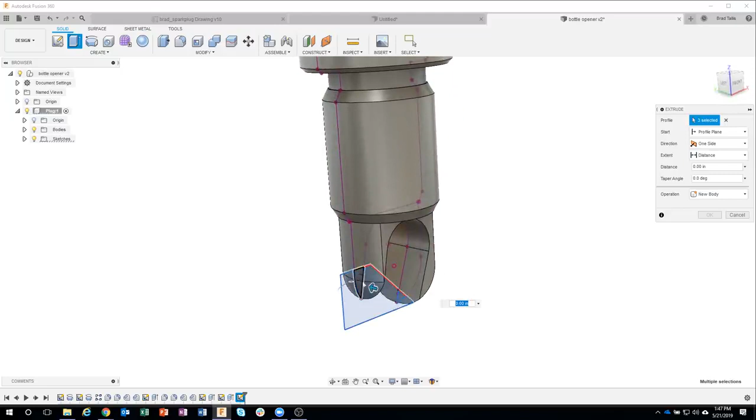Pretty cool trick, I use that one quite often, especially if my profiles are kind of buried. So let's just again do this symmetrically, machining that away. I could say distance, or I could say all, and you can see it's going to remove what it needs to, like so.

We are getting pretty close to actually being done with this. So now all I have to do is start doing some of the little tiny things. According to the drawing, there's some chamfer, 0.03 by 45, 0.08 by 30 - some little tiny chamfers and stuff on here. So that's what I'm going to do next. I'm going to zoom up here, click on that edge, and say chamfer.

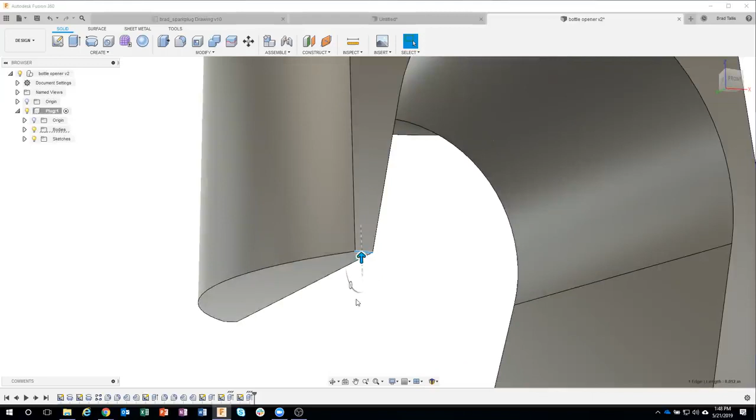Now this one is the 0.03, and I can actually select the other edge without even rotating. I can grab that other edge at the same time, and sure enough, it grabbed both of them - so 0.03 at 45. You'll notice it says distance and angle because that's the last one I did. I could just say equal distance, and it's going to be 0.03 at 45.

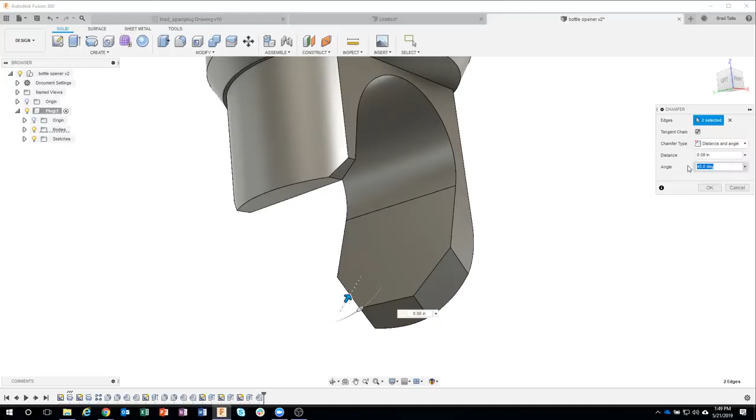Then the same thing with this guy here. I'll click on it, say chamfer. Now these are 0.08, so they're a little bit larger. I'll select both of them at the same time. But these are at an angle, so I'm going to change from equal to distance and angle, and according to the drawing, these are at an angle of 30. We can see how it changed the slope of those to be 30 degrees.

There's a really small fillet right here to break this sharp edge, so I'll say fillet. In this case, it's 0.02, and I'll select both of those edges at the same time. We can see how that's going to allow it to catch onto the bottle cap a little bit easier without these sharp edges. I'll say OK.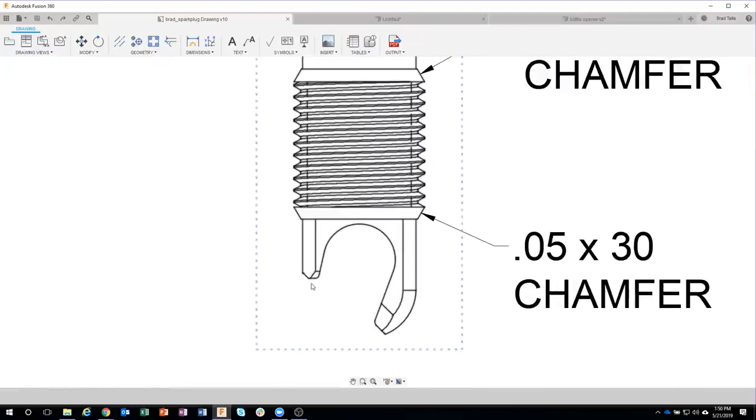And then lastly, it's kind of hard to see, but there is a very slight section right here that's been removed to help catch onto the bottle itself - you can see a little scallop right here. That is actually dimensioned in this view; we can see it's right here. It's 0.06 from this face right here. It's kind of hard to highlight, but you can see here's the 0.06 dimension.

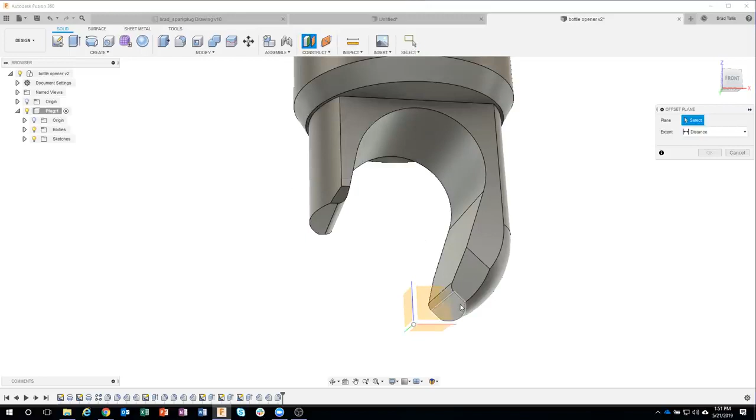So we need to machine just a little bit off right there. How can we do that? Well, I couldn't use a chamfer because that's going to go all the way along that edge. So what I want to do is basically machine that away. A neat tip here is I'm going to say offset plane, and we knew from the drawing it was 0.06 from that face.

So I'm going to select that face, and you can see it's putting a piece of paper on that face. Then, keeping it on the side view, we're going to go a certain distance - in this case, 0.06. And if we look, that plane is cutting through like so - you can see how it's slicing through right there. So we just created a plane that is 0.06 inches from that angled face.

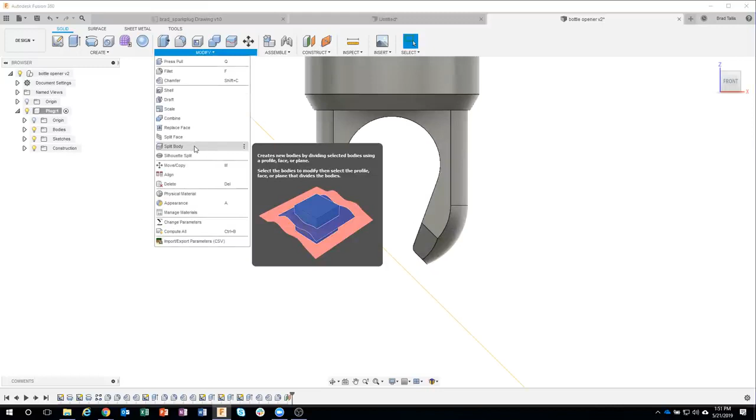Then we can use the split body command. I'm going to say split body, and we'll split that body there. Oops, zoomed too fast. What is our splitting tool? Well, the splitting tool is going to be this face. Now watch what happens in my bodies folder when I say OK. We actually now have two separate bodies.

I don't need this body 2 anymore, so I'm going to right click on it and say remove. I want to remove it from my design. And we can see, sure enough, that we sliced through there and got rid of it.

Pretty snazzy, I think. I use the split body quite a bit.

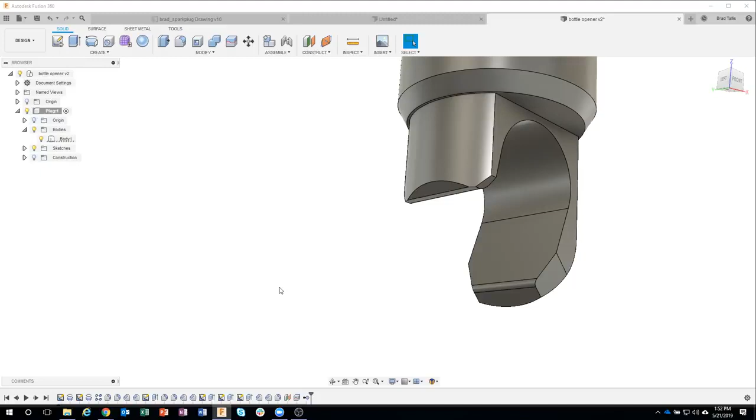Okay, all we have left is the thread. I'm going to go ahead and save again because I've made some changes. I could add a description, say added bottle part or whatever, and say OK. And you're going to see this is going to go from version 2 to version 3.

Now you might ask, well, why would you save often? Well, you might go off on a tangent with your design and say, you know, even though I've got 10 versions, I want to go back to version 7 and continue from there, because versions 8, 9, and 10 were way crazy. So after I've done a bunch of major stuff, I'll go ahead and save. I highly recommend doing that—just get that into your process to save often.

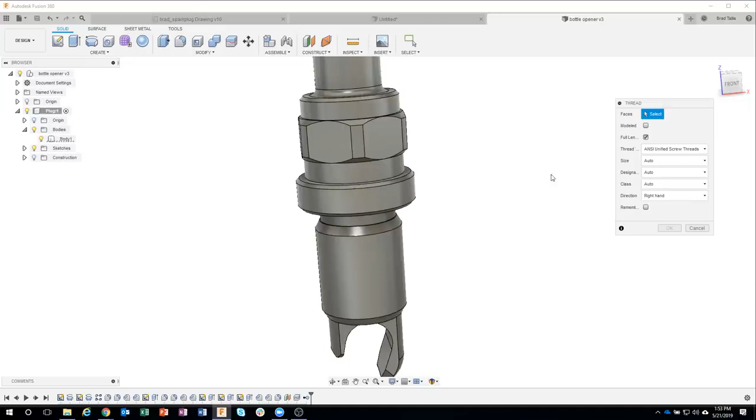Okay, so now I'm going to add the threads. Ironically, even though this is an inch part and an inch hex head, it's actually a metric thread. So you'll notice I came in here and said thread, which brings up my thread menu. It's asking for the face. I'm going to click on this face, and it recognizes it as an inch sized face. But I can come in here and say, instead of ANSI unified, I want it to be ANSI metric. It recognizes it as a 14, and the designation, according to the drawing, is a metric 14 by 1.25. So I'm going to go ahead and select that.

We can see how the preview updated a little bit. Now, in this case, I'm actually going to say modeled, that way you can physically see how it's modeling these threads. So I was able to specify that it was metric, the size and the designation, and that I modeled it. I'll go ahead and say OK.

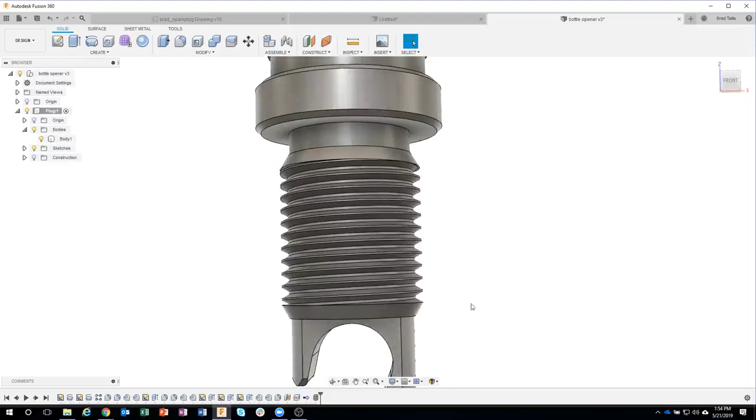But as I'm looking at this, these chamfers look kind of weird. Like, I don't think this would actually thread in. And that's because the threads only went the length of the cylindrical face. We actually want the threads to happen before we did the chamfers.

But when did we do these chamfers? Well, let's click on one of them, and it actually highlights in my timeline. You see these 3 little dashes right here? So that's showing me that that's that particular chamfer. If I click on this one, you can see that's that particular chamfer.

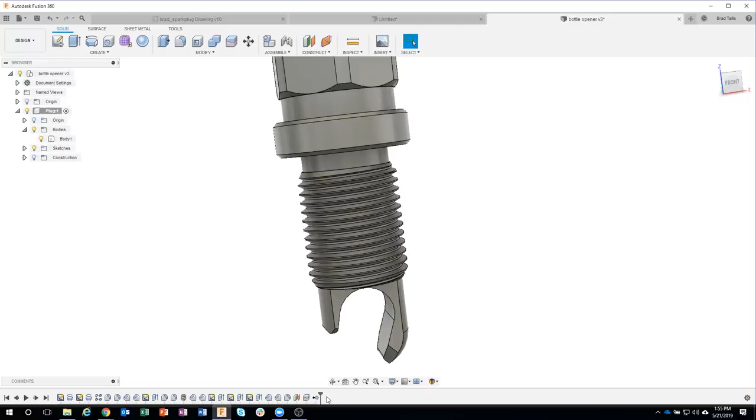So I want the threads to happen before these chamfers. Check this out—I'm just going to click and drag my threads and drop it before the chamfers, and watch what happens. It does the threads and then it does the chamfers, and this makes way more sense, like it'll actually thread into the part. So you can reorganize your timeline if necessary. I think this is wonderful that even though I did the threads last, I was able to put them in the middle of my timeline.

Okay, this is looking great. In fact, I want to make it look a little bit nicer before I send it to Angelo. So I'm going to go ahead and add some appearances to this. I'm going to hit the A key for appearance, and this is going to bring up my appearance menu. I want to make this out of metal, so let's go ahead and click on metal.

And I don't know, let's do something fun here—let's do maybe platinum. So I'm just going to drag platinum onto that part, and we can see how it changed the shininess and the appearance of that. Well, up here it's kind of a shiny ceramic or a shiny kind of white paint or whatever, so I want to simulate that also.

So let's come in here and do paint, glossy, and let's do a white enamel. Now, here's the issue—if I were to drag and drop this, it's going to color the whole thing white.

I don't want that. I only want a certain area to be white. So up here, you'll see it says faces. Well, now if I drag this, it's going to do individual faces. But there's a lot of faces in here, that's going to take some time. So I want to select all of these faces before I drop that particular material.

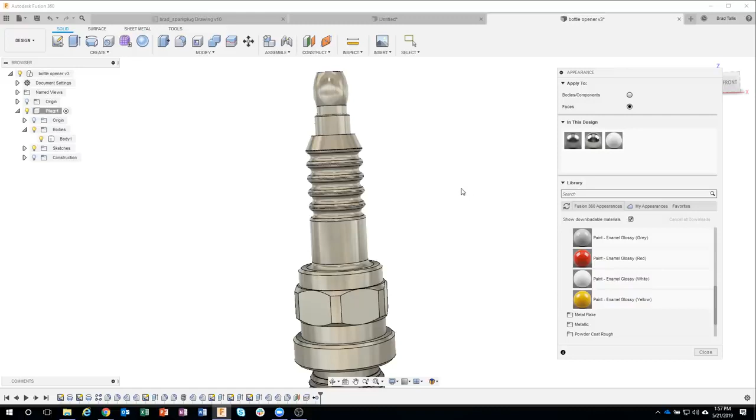Here's the issue. I'm going to drag a crossing box like so to select those faces. I'll come over here to drag my material, and you'll notice it's highlighting the whole thing again. The reason for this is the priority - it's saying if you're going over the body, select the whole body. And I don't want that.

So I'm going to show you a neat little trick. I have my material, I'm going to set this to faces. Then I'll come under my select menu to my filters, and sure enough you can see it's selecting everything - bodies, faces, components, etc. Well, I only want it to select faces, so I'm going to turn that off, say faces.

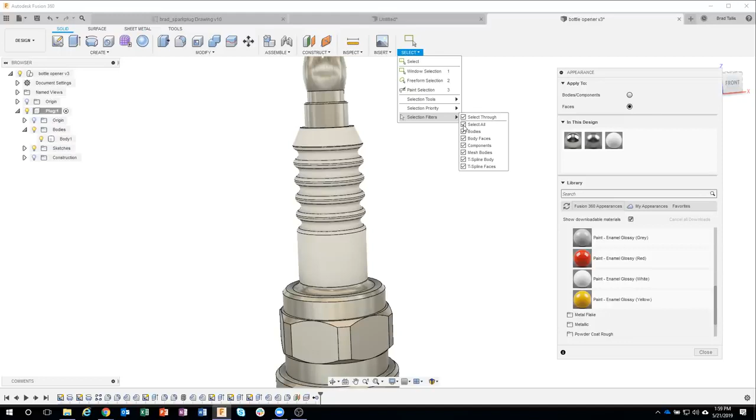I'll draw that box just like I did before, like so. And now when I drag this over, you can see it's only selecting those faces. If I drop that on there, it's going to highlight all of those with that shiny ceramic type paint. So that was under my select menu, selection filters - I said only select faces. Now I can turn that back to select all since I'm done with that.

Maybe I'll add one more down here. And then finally, I want to put a decal on here. So I'm going to say decal on this face. Let's go ahead and put our Fusion logo on there. Let's do maybe this guy here. Rotate him around, position it where I want it to be. Let's say that's good.

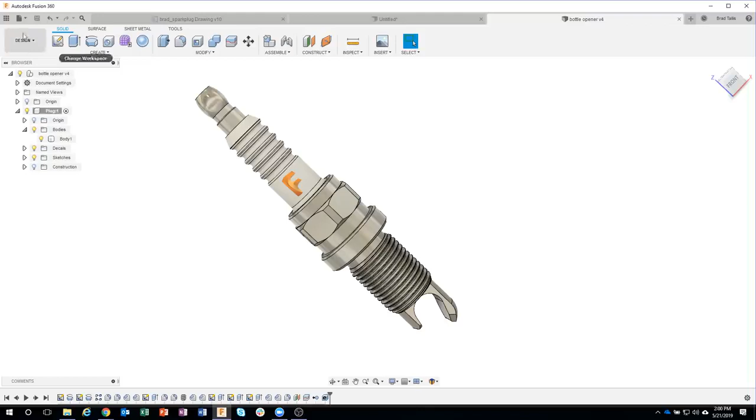Now the last thing I want to do is send this to Angelo for manufacturing. So what I can do here is open my data panel, and we can see the bottle opener. Now I'll right mouse click, and I don't want to invite Angelo to my whole project because maybe I have other things in here that I don't want him to see, where it's okay for Aaron to, but maybe not for Angelo, even though I trust Angelo. I want to just share this particular model with him.

So I'm going to right mouse click on it and say share public link. This is really slick because it allows me to click this little checkbox, and it's going to create a custom link that I can copy and send to him. You'll see right here, allow item to be downloaded - maybe he needs it as an IGES file or as an OBJ or whatever, he can specify which file format he needs it in. I could also turn that off if I wanted to.

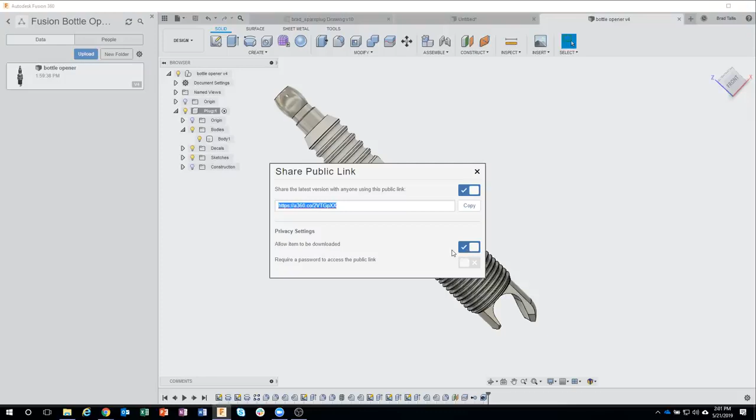But I'm going to go ahead and send this link to Angelo, and then Thursday you're going to see him actually take this part and add the tool paths to it. So definitely make sure you sign up for this Thursday, 1 o'clock Mountain.

We're right at the top of the hour. I think it's pretty cool that we were able to design a whole thing in under an hour. Now if you took me not talking about it, we could probably do this in 15 or 20 minutes.